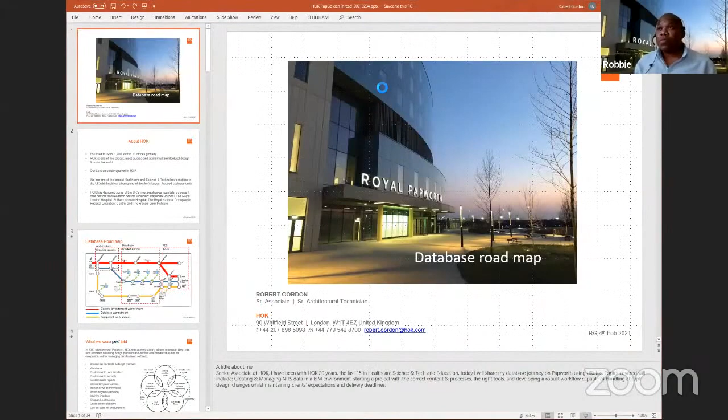A little bit about myself. I'm a senior associate at HOK, and I've been with HOK for 20 years, the last 15 in healthcare, science and technology, and higher education. Today, I want to share with you my Papworth journey, how we created and managed the NHS database in a BIM environment, starting the project with the correct tools, and developing correct workflows that are robust enough to handle design changes.

A little bit about HOK. HOK was founded in 1955. It currently has circa 1,700 staff in 23 offices globally. HOK is one of the largest and most diverse acclaimed architectural design firms in the world. It opened its London office in 1987, where we are now one of the largest healthcare science and technology practices in the UK, with healthcare being one of the firm's largest focus units.

We have designed some of UK's most prestigious hospitals, outpatient care centres, and research buildings, including Papworth Hospital, the Royal London Hospital, St. Bartholomew Hospital, the Royal National Orthopaedic Hospital outpatient, and the Francis Crick Institute, which is a lab project.

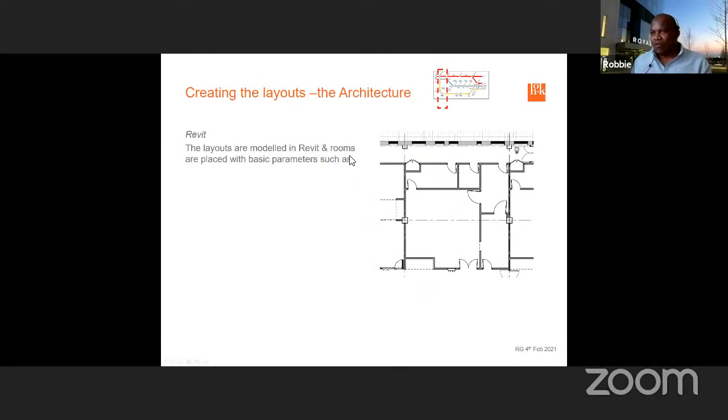Like you had to test whether a bed could go into a room or whether a wheelchair user can actually get around the space. So in Revit, the layouts are modeled and the rooms are placed with basic parameters such as the room name, the number, and the department. The coordinated plans at this point, whether it's 1 to 200s or 1 to 500, go for review with the stakeholders. And all rooms are imported and linked to the database in order to create a schedule of accommodation, which we then use to validate against the original brief.

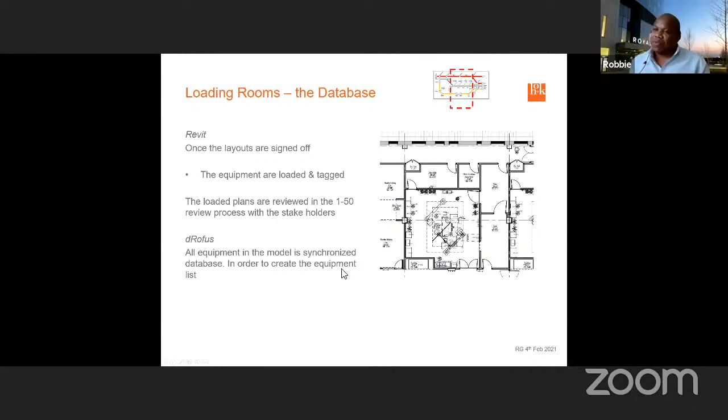The layouts, once signed off, we go into loading mode. So we load all equipment and we tag them. And we import the equipment against each room in the database by the synchronizing method that we showed earlier on. This then allows us to create the equipment list and the total room data sheets.

Not everything needs to be in the Revit model, and equally not everything needs to be in the database. So Revit handles the object and the code and the location, and dRofus will handle things like the room activity, the MEP space, MEP data, which is done by our MEP consultants. We gave them access to the database and they were able to go in and fill in these properties themselves. So we were no longer gatekeepers where they sent us an Excel spreadsheet and we import it. They were actually live design partners in the process.

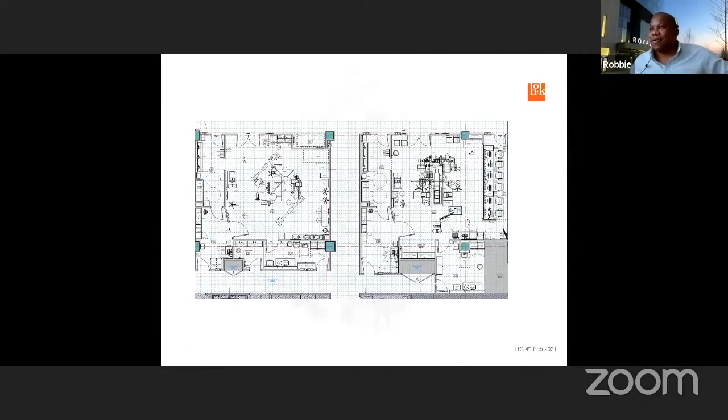And here is how complicated some of the room spaces are. And we actually placed complicated equipment to test whether the room would work with or without, or what adjustments we need to make. And this is an Artis Zeego unit that we were asked to investigate if it would work. And the test here is to work out whether the equipment could be hung from the ceiling or sat on the floor. I believe in the end, they strengthened both just in case they went for one or the other.

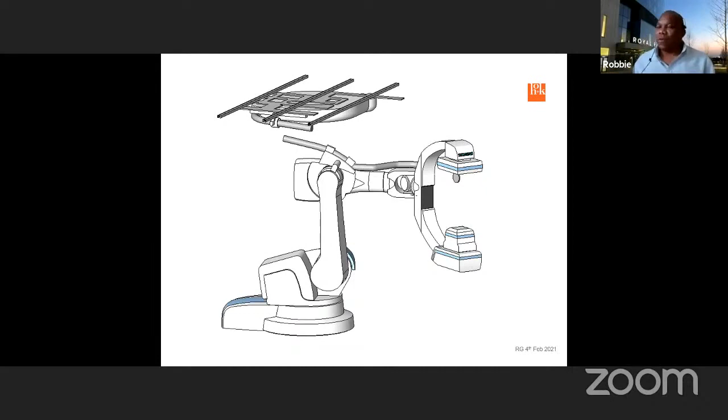So transparency. We gave access to the client and the contractor, read-only access, and we agreed a workflow for them getting comments back to us. And that could be in the form of emails, because we needed one source of communication.

The MEP consultant had total control over the MEP section. They updated that section in partnership with the medical planning and equipment loading. And we encourage the users not to just go in and say, I don't like this, I'm going to change it. Once the layout is agreed, the changes can only be implemented based on an instruction.

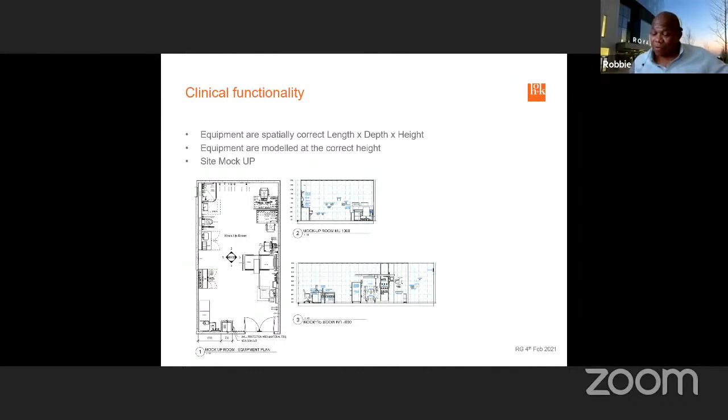Clinical functionality. So all equipment is modeled correctly. So the correct height, depth, width, and they're placed at the right height. So a socket would not be on the floor. It would be 450 mil off the floor as a starter. And we did mock-ups to prove that they work, which they did, and these were proven to be useful in the development of this room.

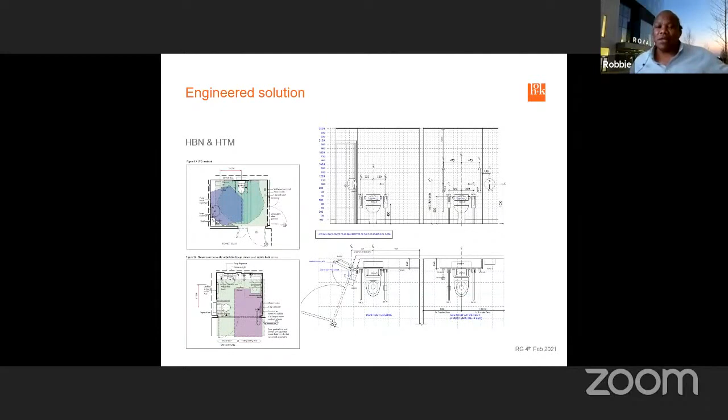And we developed standards based on the healthcare Health Technical Memoranda and Health Building Notes to get compliance. And this got us status A. And this is one of our celebratory drawings when we got our first status A.

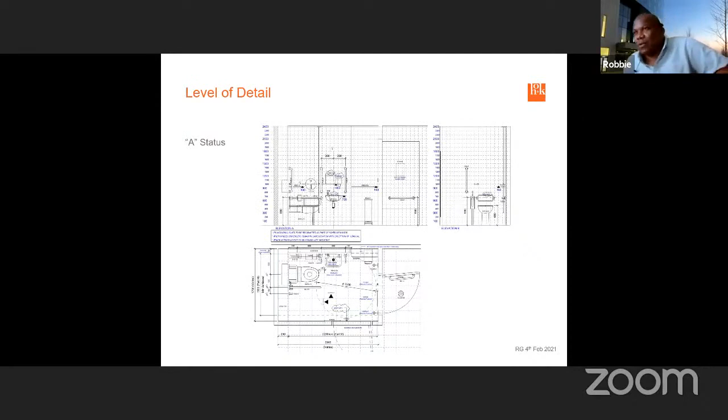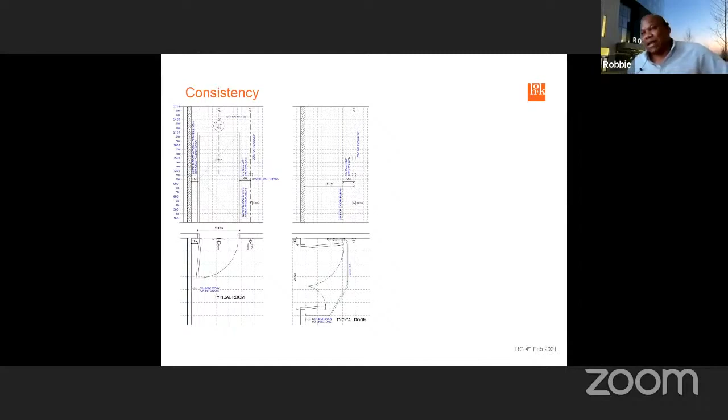And we developed rules about what happens around a door, like how far it should be from a wall, where the clock sits, what happens for the light switch, and where the cleaner sockets are. The cleaner sockets, there are over 2,000 on the project. And we developed rules for what happens between doors in the critical care ward.

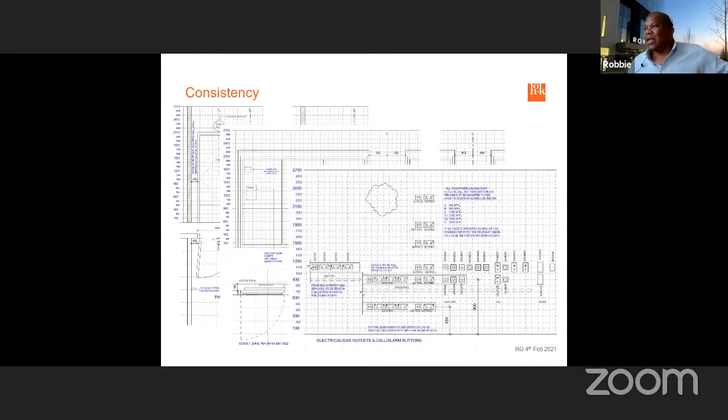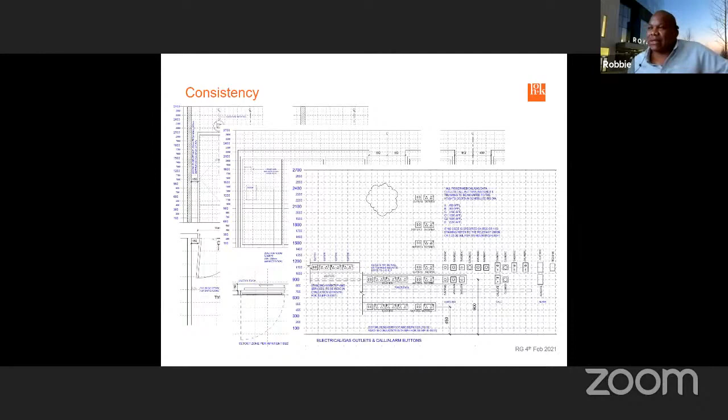And we developed mounting heights, which show what height the equipment needs to be when it's used in a particular condition. So below a desk, above a worktop, and so forth.

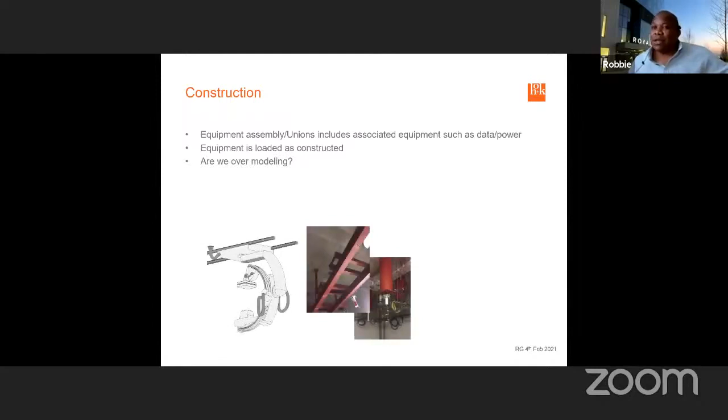We created the families and unions to include all the associated equipment, and what we're trying to say here is that if a fridge needs a plug, we associate a plug with it. If a phone needs a data point or power point, we add it to it. The equipment is loaded as you would construct it, and in some cases it may appear that we may be over modeling, but we needed this equipment, and the reality is as you see.

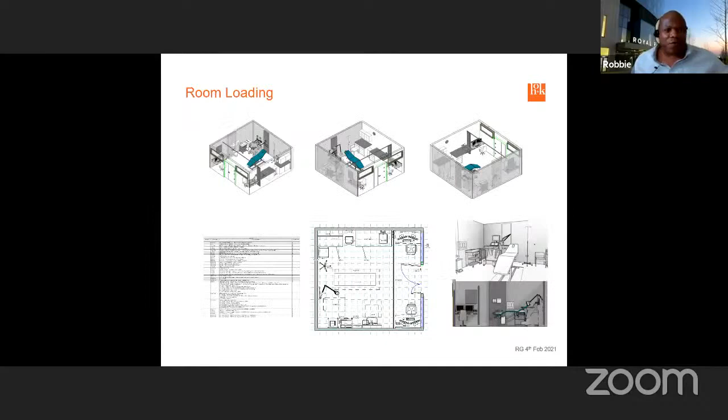And I think we're 5 minutes to go. We're running out of time now.

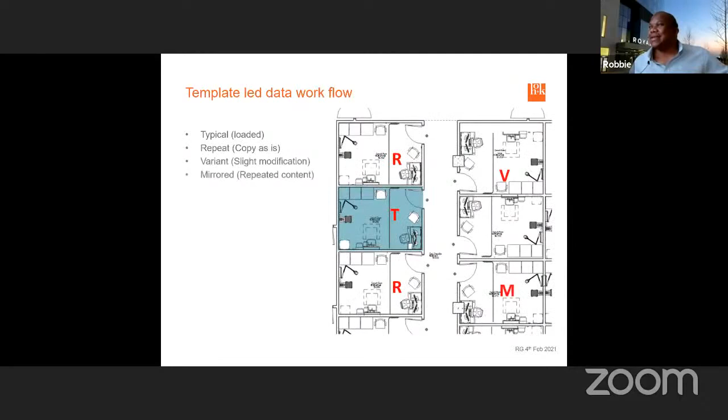Okay. So basically, we created golden rules. We created templates which we apply and repeat. Let me just go through. We created lots of individual elements which are loaded onto technical equipment. We were able to create wall elevations, we're able to use the equipment in other hospitals, and we're able to load 93,000 pieces of equipment in every room in a virtual model.